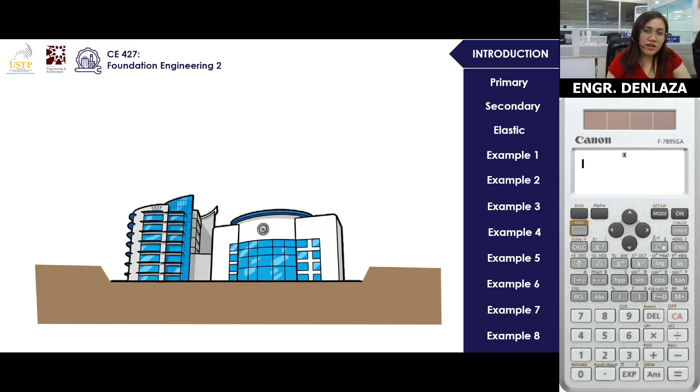So this process, the loading of the building, has exhibited the soil settlement, wherein it is defined as the downward movement of soil due to changes in stresses acting on it. So that's the most simplified definition with regards to soil settlement.

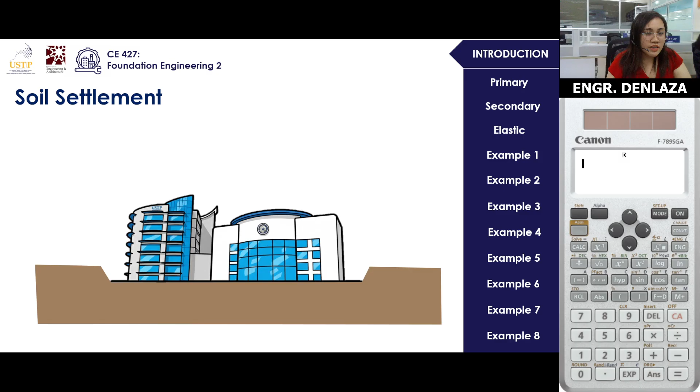To dive in more onto this topic, the mechanism is that when a load is applied to the soil, such as the weight of a building, the soil particles compress and rearrange. This causes a decrease in the volume of void spaces because it becomes more compact, and this compression leads to settlement over time.

There are several possibilities with regards to settlement, such as instant settlement or gradual settlement, depending on the type of soil that a certain structure is located on. So in this discussion, we will be discussing those classifications.

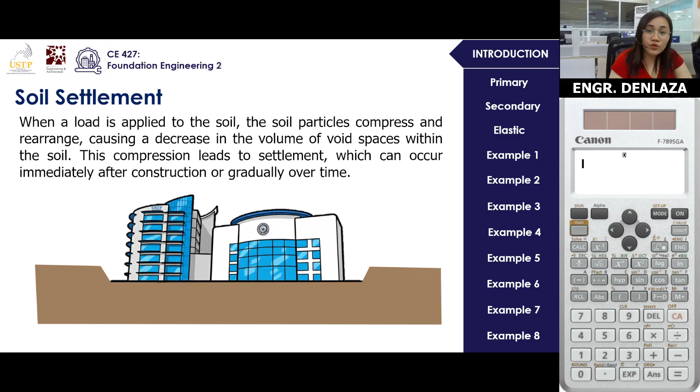To elaborate more on this concept, stress increase in saturated soils causes an immediate increase in pore water pressure. In highly permeable sandy soils, drainage occurs quickly, since we know that sandy soils have larger voids. When that happens, it leads to an immediate settlement.

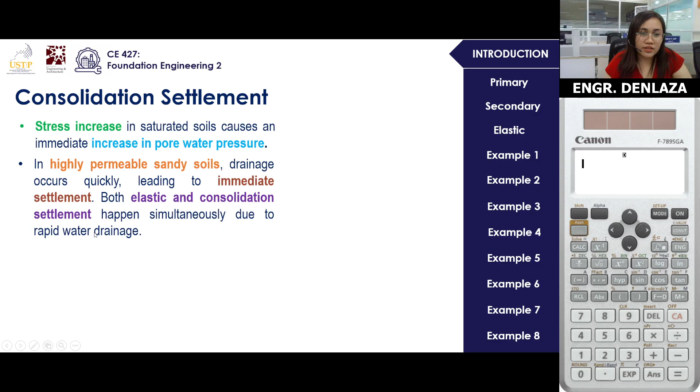Both elastic and consolidation settlement happen simultaneously due to rapid water drainage. Compared to compressible clay, we know that clay has low permeability wherein water drains slowly. As a result, consolidation continues over a long period, and the consolidation settlement can be much larger than the initial elastic settlement.

To elaborate more, whenever there is a stress applied on a specific soil profile—exaggerating it a bit—there will be a downward motion pressing those void spaces, and then there will be expulsion of that water, which leads to settlement.

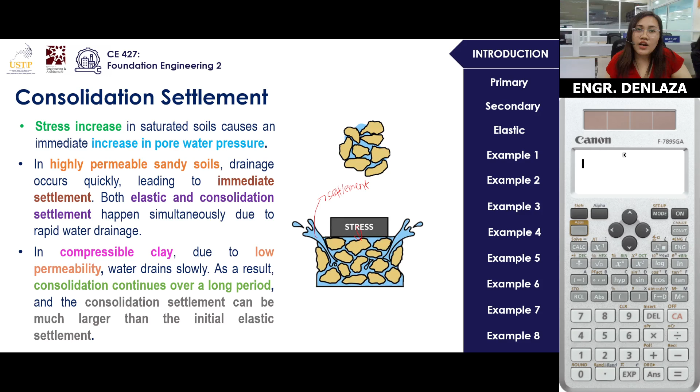So that's an overview with regards to settlement. This discussion will mainly go over three types of settlement, or categories: the primary, secondary, and the elastic or immediate.

Let's define these three before we dive into some examples. Primary consolidation settlement is the result of a volume change in saturated cohesive soils because of the expulsion of water that occupies the void spaces. That's the base model, the typical scenario that happens when settlement occurs.

Compared to secondary consolidation settlement, it is observed in saturated cohesive soils and organic soil, and is the result of plastic adjustment of soil fabrics. For example, if this is your soil, after plastic deformation it turns into a smaller one. Originally it had a certain size, but due to plastic deformation it keeps getting smaller. It is an additional form of compression that occurs at constant effective stress.

Lastly, for the immediate or elastic settlement, it is caused by elastic deformation of dry soil, and of moist and saturated soils without any change in moisture content. It's the most instant response of the soil to the new stress conditions.

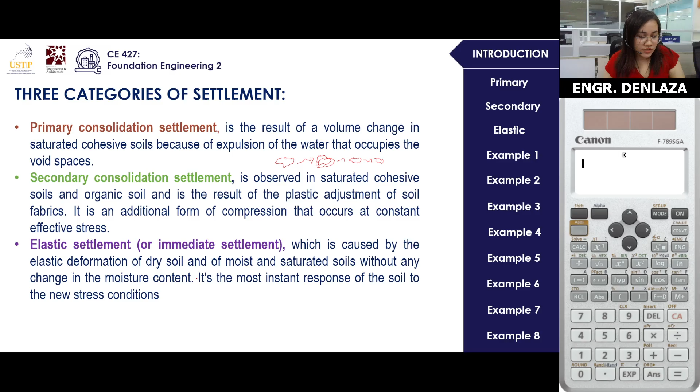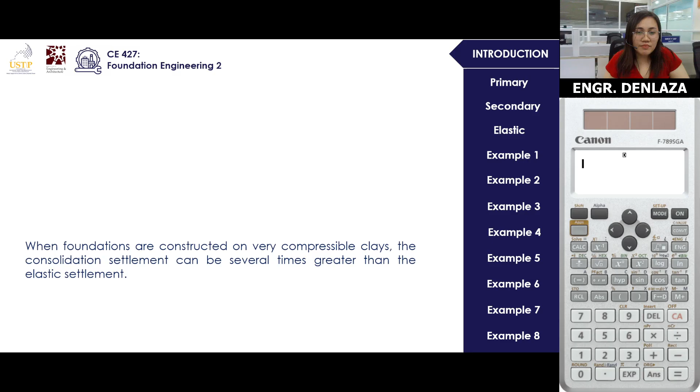Now let's go over the total settlement. What is this total settlement? Total settlement happens when foundations are constructed on clays—we know that clays are highly compressible, and consolidation settlement can be several times greater than the elastic settlement.

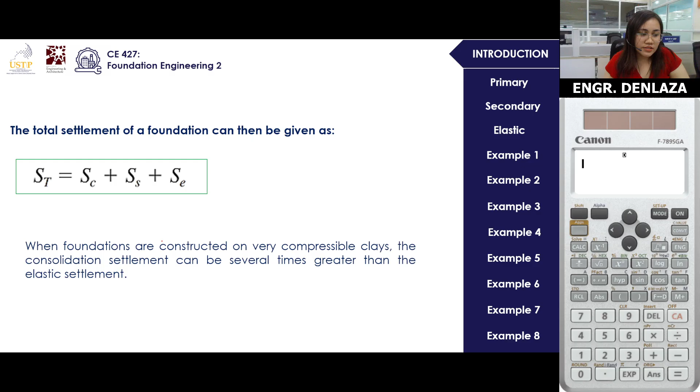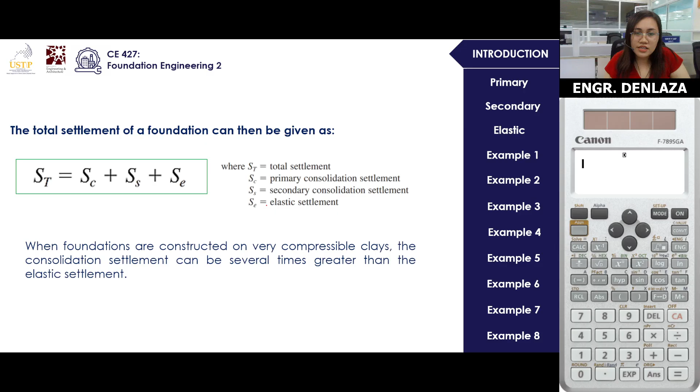The total settlement of foundation, or the total compressibility of soil, is exhibited through this equation: ST equals SC plus SS plus SE. ST is the total settlement, SC is the primary consolidation, SS is the secondary consolidation, and SE is the elastic settlement.

Let's start with the primary settlement. There are actually two scenarios of primary settlement. The first one is normally consolidated clay, whose present effective overburden pressure is the maximum pressure that the soil was subjected to in the past.

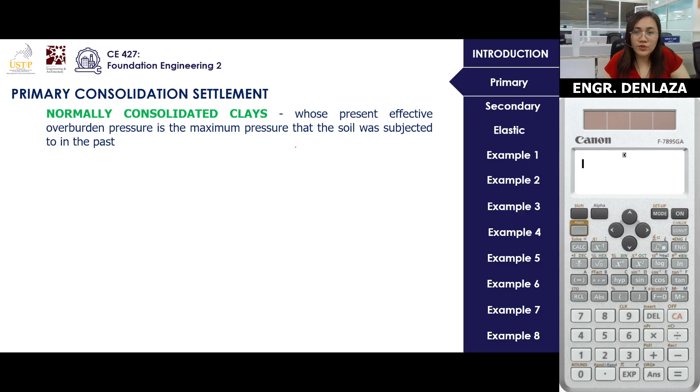Compare that with overconsolidated clays, which happens when the soil's present effective overburden pressure is less than what it experienced in the past. So technically, that's the difference between the two. The maximum effective past pressure is called the pre-consolidation pressure, typically labeled as P sub C.

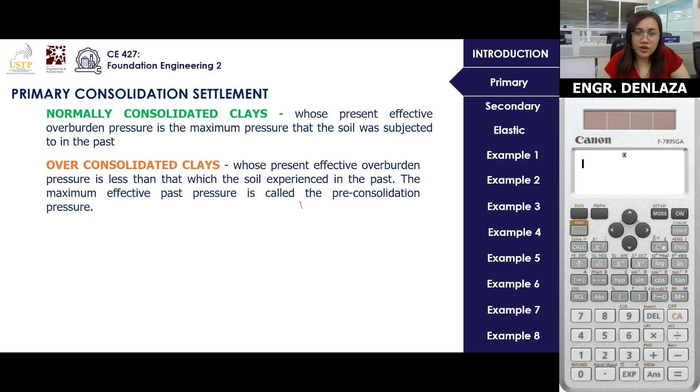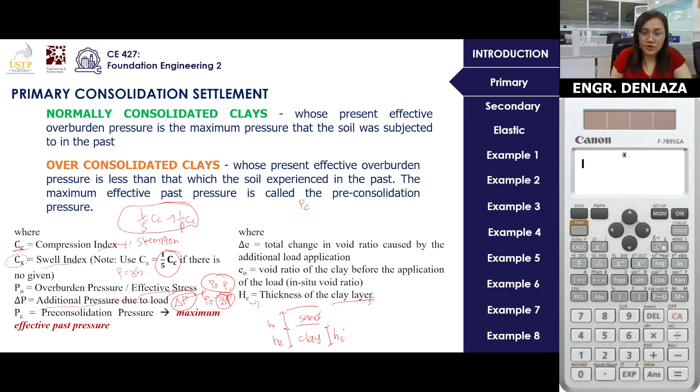Anyway, this is the equation I showed you before: total settlement equals the primary consolidation settlement, secondary, and elastic settlement. But now, since we're talking about primary consolidation here, let's focus more on the SC, highlighted in yellow, which should be visible on your screen.

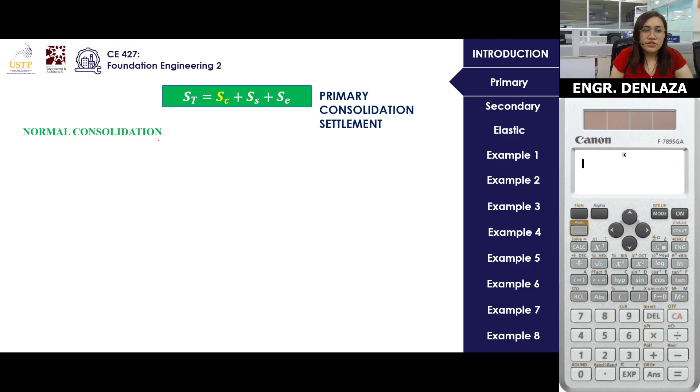So there are two cases: normal consolidation and over-consolidation. Given that, I created a flow chart or flow process on how to solve this. This is the general equation pertaining to settlement in terms of primary consolidation under normal consolidation.

LL is the liquid limit. There are other formulas for compression index, but Skempton's equation is the one we typically use. So focus more on memorizing this.

That's for the flow process in getting the normal consolidation, the primary consolidation. What about if the case tells us it's an over-consolidated soil, or the analysis requires us to account for the overburden pressure? So what's now the difference with the equation? The equation we typically assess ranges between two conditions.

In the first condition, the sum of your initial pressure P sub 0 and your change in P should be lesser than your pre-consolidated pressure, P sub C. If that happens, the equation you will be utilizing should be this one.

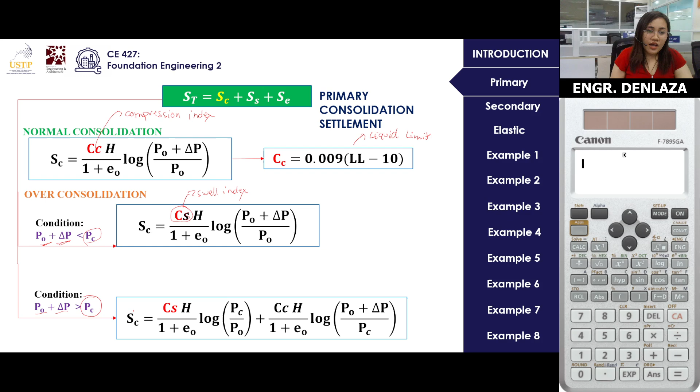SC equals CSH over 1 plus E sub 0, log of the quantity P sub C, which is your pre-consolidated pressure, over your initial or effective stress, plus another term: CC, or your compression index, over 1 plus E sub 0, log of P sub 0 plus change in P, all over your pre-consolidated pressure.

If you notice the differences between those two equations, for me it's not too much of a discrepancy, just specific portions that change. When you start with normal consolidation, the difference is just the CC and the CS. Comparing the overconsolidation first case to the second case, now there are two terms to be taken into consideration.

So there's a ratio between the pre-consolidated pressure and your initial pressure.

If you notice, this is CC, or your compression index. This is not CS. This is just CC, the compression index. And then that's log.

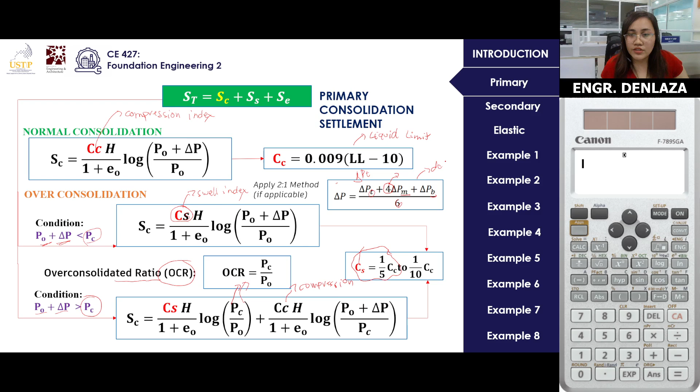Change in P is equal to the change in pressure at the top, middle, and bottom. So if you notice, there's a 4 added here, that means it becomes the multiplier. This is actually a derived equation, but to elaborate more, P sub T is the pressure, change in pressure at the top, at the middle, and at the bottom, all over 6. That's the default formula.

Okay, secondary settlement. We have here the SS. So that is SC which is the primary, then SS is the secondary. If you would elaborate more, this is the equation for now: C alpha multiplied by height, 1, all over 1 plus E sub P, log of T sub 2 all over T sub 1. If we expand E sub P, how do we obtain that?

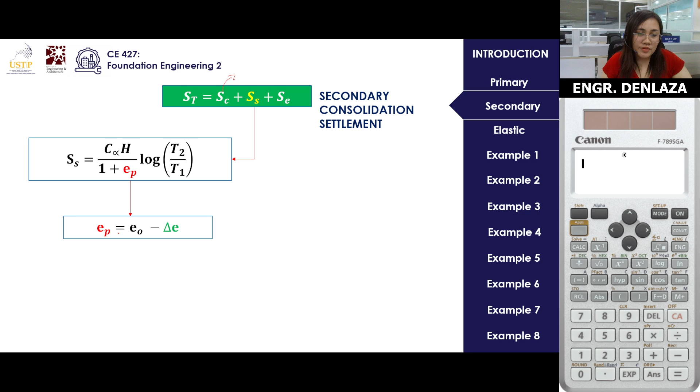That is obtained by this equation: E sub P is equal to E sub 0 minus change in E. And lastly, how do we obtain the change in E? Change in E has this equation: CC log of PO plus change in P all over PO.

I know the variables aren't familiar yet. So again, C alpha is the secondary compression index. Then E sub P is the void ratio, the difference between those. And what I want to highlight to you guys is the difference between T sub 2 and T sub 1. T sub 2 is after the primary settlement, time after completion, so that's typically longer, meaning a bigger value.

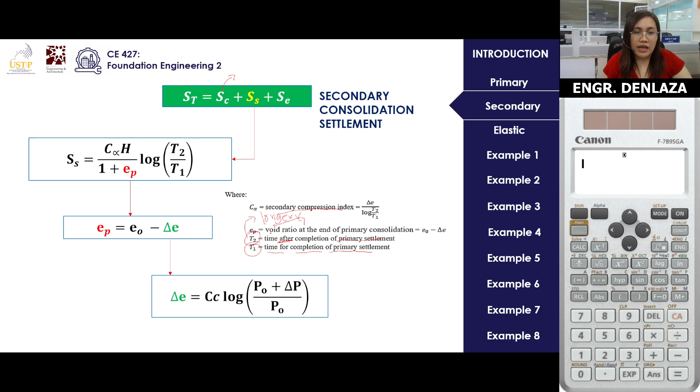And T sub 1 is the time for completion of the primary settlement, so it becomes one. I'll give you an example of this to further clarify the discussion.

Okay, next discussion is the elastic settlement. So elastic settlement is this equation: S sub E. And S sub E has two cases actually: this S sub E is CS times QB multiplied by 1 minus your Poisson's ratio mu squared, quantity all over E sub S.

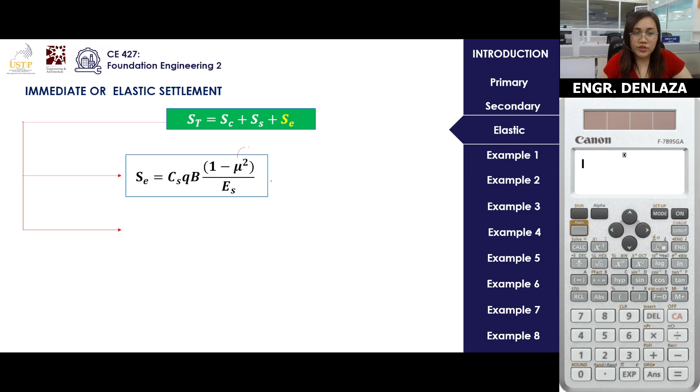And another equation is this one: there's no C sub S, but you have QB, similar but with an influence factor instead. So how do we obtain Q? Q is obtained by force over area, or it could be force. Stress, sorry, this is the force. This is stress, this is the force for the pressure, then this is the area.

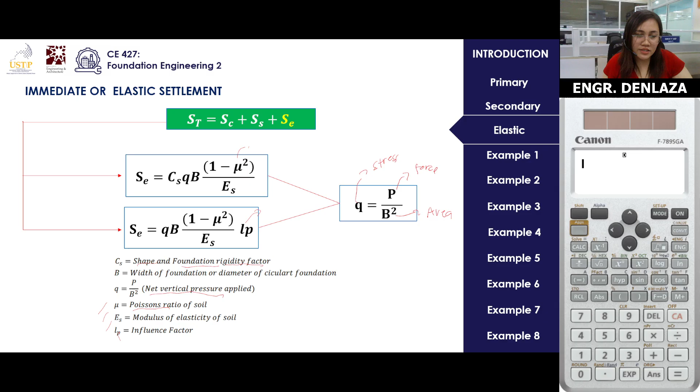Then again, CS is the shape and foundation rigidity factor. B is the width, net vertical pressure, then Poisson's ratio. And E sub S is the modulus of elasticity of the soil, given in the problem, along with the influence factor, IP. In some instances it's called IF, but in my case it's IP.

Okay, let's try to solve example number 1. The soil profile shown in the figure consists of a 9M layer of sand underlaid by a 6 meter layer of clay.

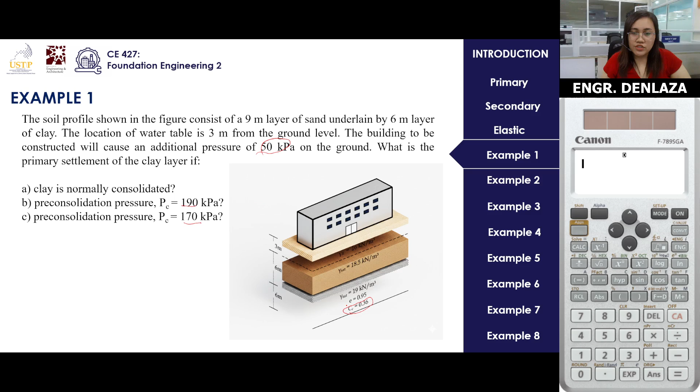The location of the water table is 3M from the ground level, and the building to be constructed will cause an additional pressure of 50 kPa on the ground. So what is the primary settlement of the clay layer if it is normally consolidated, if it has a pre-consolidated pressure of 190, and for part C it's 170. So if you notice in our isometric view, the building sits on a sand layer 9M thick, and you have here the unit weights and other properties, including the compression index and the void ratio. Let's try to solve this problem.

What you should take into consideration is that when you analyze settlement, it's always at the mid-height of the clay. Why is it always mid-height? Typically the explanation is that at the mid-height of clay, of course you won't know exactly if it's uniform, but according to scientists, they account for the average. So to make it safe, the average is taken into consideration. That's why mid-height of clay is what's being analyzed.

So for normally consolidated clay, this is our equation. Do we have the CC? Check. Do we have the H? Naa. E sub 0, do we have it? Yes, check. How about P sub 0? We don't have P sub 0 yet. And do we have the change in P? We do, that's the additional pressure, 50 kPa.

So the first thing to do is solve for P sub 0, and P sub 0 is just the effective stress. So now, how do we obtain the effective stress? If effective stress is solved as what?

So it's gamma H, right? P is the summation, P equals the summation of gamma H. So that's 16 times 3, plus 18.5 times 6, plus 19. If this is 6M, half of that is 3M. So that's 19 times 3, then equals.

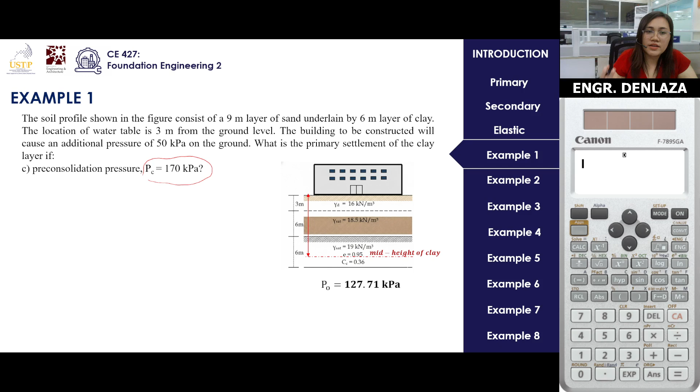And lastly, for the third question in this problem, what if your P sub C is 170? So what now happens? Same process as earlier, but we already calculated that it's 177.71, and that's larger than the pre-consolidated pressure. So since that's larger, we use the other case, which is this equation used earlier. So express that.

That's one-fifth of your CC for the CS, 6,000. 1 plus 0.95, then the 170, which is your PC, all over P sub 0, plus 0.36 - again this is CC, not CS. CC, or the compression index. That's the total height of the clay, HC, expressed in mm. 1 over 1 plus 0.95 logarithmic of 127.71 plus 50, that's P0, and that's the change in P, and this is your PC. Express that in your calculator, we will be obtaining 48.86 mm.

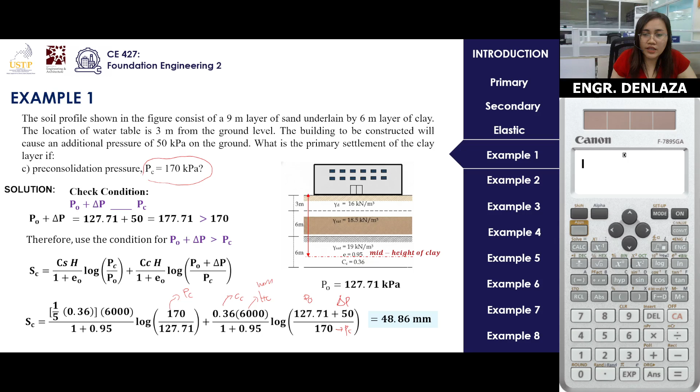And example number 2. A 2-meter clay layer has a void ratio of 0.92, a specific gravity of 2.72, and a liquid limit of 40%. Above the clay is a 3-meter thick sand layer with a void ratio of 0.50 and specific gravity of 2.62.

The water table is located 1.6 m below the ground surface. So if this is your ground surface, the water table is located 1.6 m below the ground.

And a 3 m thick backfill is placed on the ground surface with a unit weight of 17.3. So it's not shown in the illustration, but we have a 3m thick backfill. It's placed on top, not really a mound, but more like a layer, and that's 3m. So it has a unit weight of 17.3.

So this tells us, whatever pressure that you will be getting, that's the change in P. How do we define the change in P? That's the additional pressure. Since it tells us that the backfill is placed on the ground surface, that tells us that whatever we calculate as the pressure here is our change in P. But that's for later. We are to solve for the CC, the effective pressure at the midpoint of the clay, and the primary settlement - that's your SC, assuming normally consolidated.

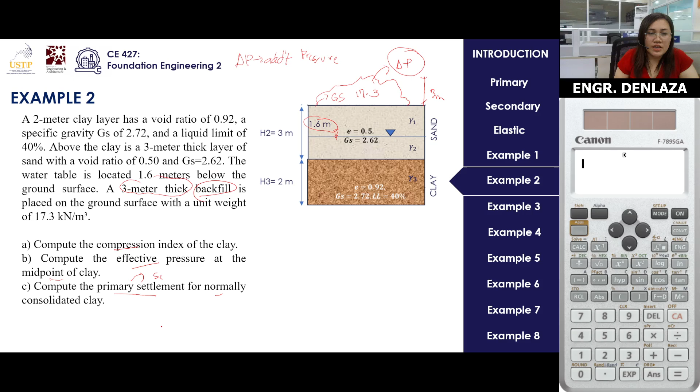So let's solve the first problem: CC. This is the Skempton equation: CC equals 0.009 (LL minus 10), where LL is your liquid limit. Do we have the liquid limit? Yes, it's 40%. So what we're going to do is just plug in 40 here. So CC equals 0.009 times (40 minus 10). Simplifying, we get 0.27 as the final answer.

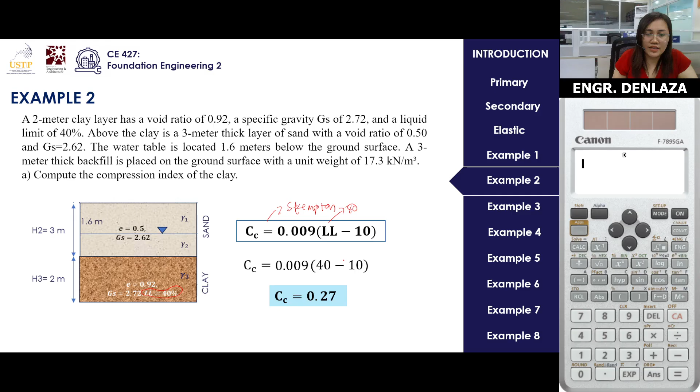Next problem: compute the effective pressure at the midpoint of the clay. So we need the effective pressure at the midpoint of clay and at the sand layer. Let's calculate the sand first. Do we have the unit weight? Of course not, but it's easy to obtain. Since it's dry, we use GS times YW over 1 plus E. Simplifying, we get a unit weight of 17.13 kilonewton per cubic meter.

What about the saturated portion? That's Y sat equals (GS plus E) times YW over 1 plus E. Expressing that, we get 20.40. So actually guys, we can derive this equation as a tool. From this value, we can obtain it. Same thing can be done for Y sat - check it yourselves.

Anyway, let's analyze the unit weight of the clay. The clay layer is saturated. So we use the same equation - those are all values given. Simplifying, we get 18.6 kilonewton per cubic meter.

So how do we calculate the effective stress at the midpoint of the clay? That's P sub 0 equals 17.13 times 1.6 - that's gamma H - plus 20.40 times 1.4, which is this side, plus the mid height of clay, plus 18.6 times 1, because the mid height of the 2m clay layer is 1m from this point. Now this is not yet the final answer, because this portion is just the total stress. We have to subtract the water pressure, because this portion is submerged in water. So that's 1.4 plus 1, which is 2.4, times 9.81. Simplifying, we get the effective stress or pressure to be 51.02 kPa.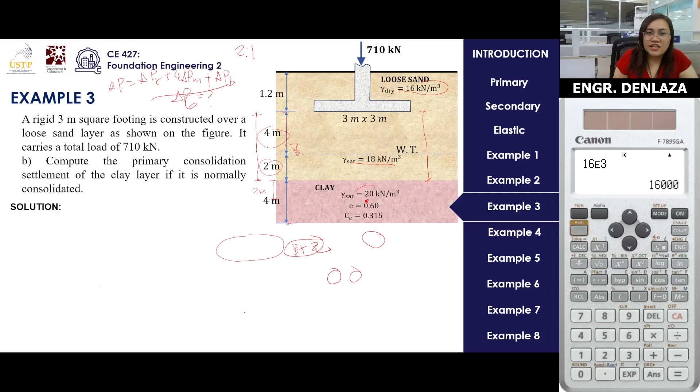Anyway, since we already got the values for SC and SE, recall the generic equation for total settlement is SC plus SS plus SE. Since we already have SC and SE, all that's left is SS, which is the secondary settlement. The secondary settlement equation requires certain values. Do we have the C alpha? Check. Height of clay? Check.

What about E sub P? Is it given? Maybe. Then T sub 2 and T sub 1 are also given, which are the 5 and 2 years respectively. So E sub P is the difference between your initial void ratio and the change in E. But again, your change in E has this equation: CC log of quantity P0 plus change in P over P0.

So simplify that equation: 0.315, logarithmic of 119.96 plus 6.08, all over 119.96. Simplify, and you get this change in E, which is very small. So plug that into this equation, giving 0.60. How do we get 0.60? Using this equation, 0.60 minus 6.764 times 10 raised to negative 3. Simplify and see what you get.

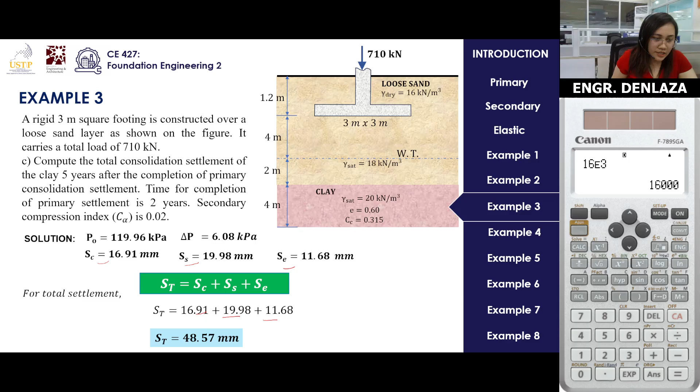That's it for example number 3. Let's go to example number 4.

Example number 4. A soil profile is underlain by 2.4 m thick soft clay layer that will be subjected to severe settlement when the water table is lowered to improve site drainage. The silty sand has a unit weight of 15.60 kN/m³ above the water table and a saturated unit weight of 16.58 kN/m³ below the water table. The clay is normally consolidated, having a void ratio of 1.2 and a water content of 44%, a liquidity index of 0.8, and a plastic limit of 20. Determine the compression index CC, determine P sub 0, the effective stress increase, and the settlement that would occur in the clay in response to the lowering of the ground water.

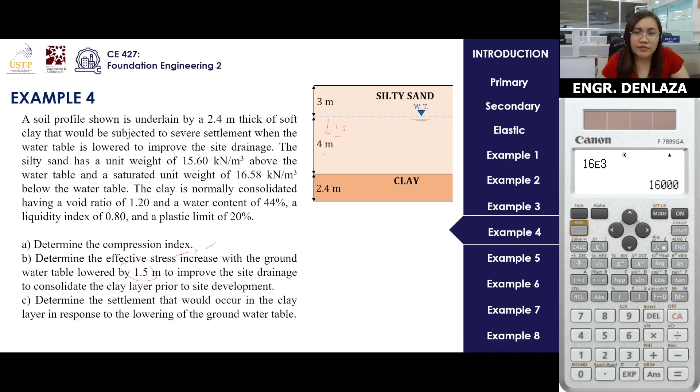Take note that for this condition, the water table was changed — it will be lowered by 1.5 m. So that's our first case, lowering it by 1.5 m. Let's simplify the equation and determine the compression index.

So simplifying, LI which is 0.8, we can get LL from that. W is 44, minus the plastic limit 20, divided by LL minus 20. Simplify to get LL, which is the liquid limit — don't confuse liquidity index with liquid limit, you might get confused. That's 50. Plug that in: 50 minus 10, simplify, and we get a value of 0.36 as our answer.

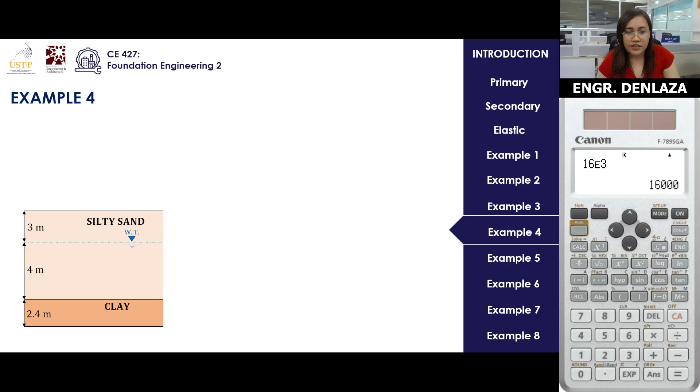For the second problem: determine the effective stress increase with the groundwater table lowered by 1.5 m to improve site drainage and consolidate the clay layer prior to site development.

First, we don't have all the unit weights. How do we get the saturated unit weight? We use the specific gravity of solids, which is 2.73, and plug that in to get the saturated unit weight. We get the saturated unit weight to be 17.52. That's from the weight-volume relationship topic.

Next, using these equations and values for the unit weights, we get the effective stress increase. First condition is the as-is scenario: the current location of the water table is 3 m below the top surface of the silty sand. So gamma H, P sub 01 equals 15.6 times 3, plus 16.58 times 4, plus 17.52 times 2.4 divided by 2, minus — since we want the effective stress — 9.81 times (4 plus 2.4 divided by 2). Simplifying, you get 83.132 kPa.

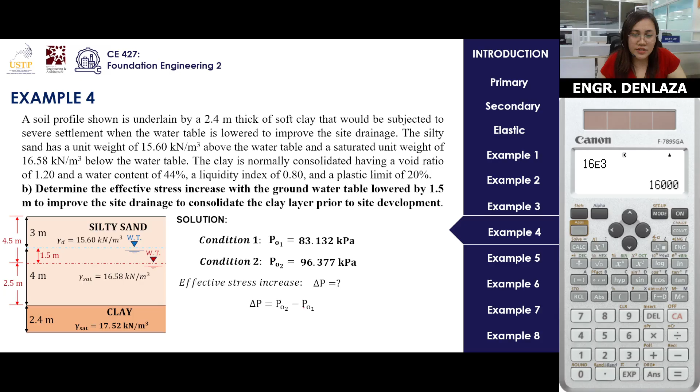So those are the values. Now how do we obtain the effective stress increase? That's the change in P, which is just P sub 02 minus P sub 01. That's 96.377 minus 83.132, which equals 13.245 kPa. Okay, those are the answers.

Now the last problem: determine the settlement that would occur in the clay in response to the lowering of the groundwater table. For normally consolidated clay, there are many possible scenarios, but by default we assume it's normally consolidated clay.

So we use this equation automatically: we have CC equal to 0.36 that was solved earlier, 2400 which is the entire height of the clay expressed in mm, and 1 plus 1.2 which is the void ratio given, times the logarithmic term. If you notice, the P sub 0 initial pressure is the one we used, and the change in P is 13.245. Simplifying, we get 25.22 mm as our final answer.

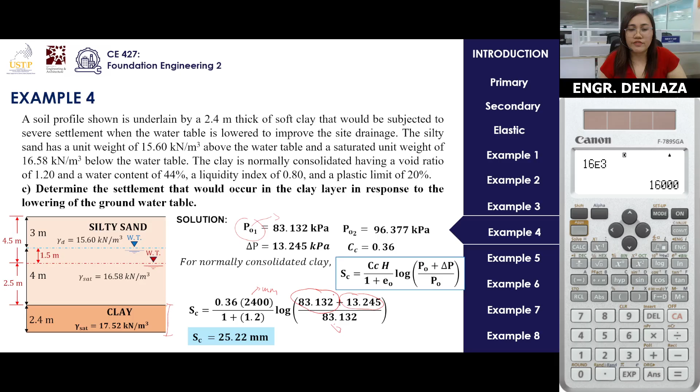Next time, example number 5.

A tank 12 m high, filled with oil having a unit weight of 9.4 kN/m³, is to be built on a site. The existing soil profile consists of 3 m of sand underlain by 14 m of...

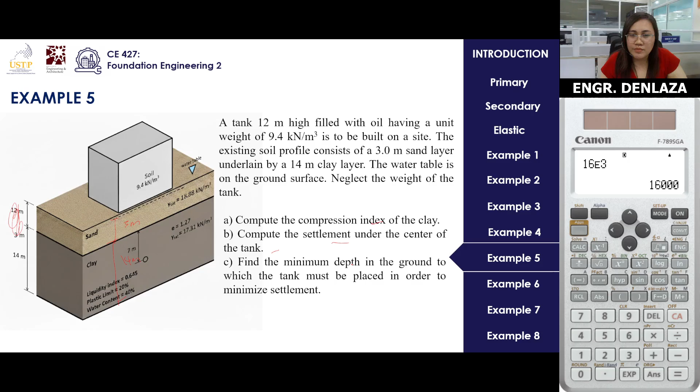So compute the compression index, the settlement under the center of the tank, and the minimum depth in the ground to which the tank must be placed in order to minimize settlement.

Okay, compute the compression index, CC. We don't have the liquid limit, but we have the liquidity index. Solving for LL: LI equals 0.645 equals 40 minus 20 over the unknown, which is the LL. Then minus 20, all over that, simplified, you would be able to get 51.01 for your liquid limit.

So substitute, and the expression gives us 0.369 as the final answer.

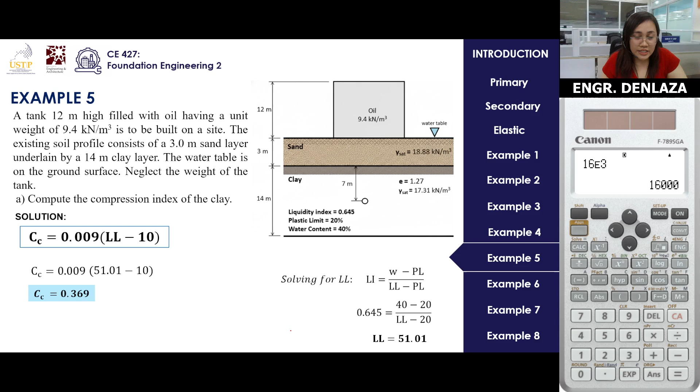By the way guys, regarding the height, I don't recommend the first one — the correct heights are 12 m, 3 m, and 14 m. So 12 m is the height of the tank, 3 m is the sand, and 14 m is the clay.

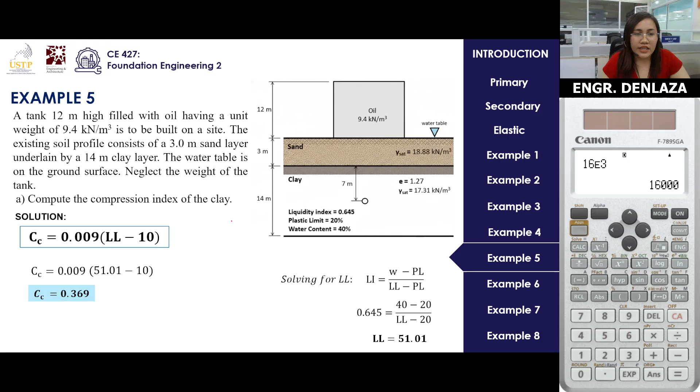Solution: solve for the effective stress at the mid-height of the clay. So P sub 0 equals 18.88 times 3, plus 17.31 times 7, minus 9.81 times 3 plus half of your 14, because the water table is located at the top surface, so everything is submerged for you to get the effective stress.

That's 79.71 kPa. What about the stress increase, the change in P? What happens is that the tank adds an additional load, and that additional load is our change in P.

Since we have a unit weight and we also have the height, pressure is just gamma H. So what we get is 9.4 times 12, giving us a change in P, an additional load of 112.8.

Now for normally consolidated — there's no statement for over-consolidated. It's not clear that it's over-consolidated, which would have a pre-consolidation pressure, or secondary if it's not primary. So just assume it's primary, normally consolidated.

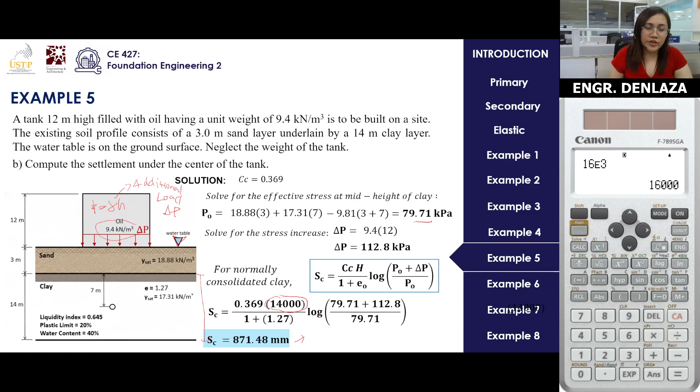Lastly, for this problem: find the minimum depth in the ground to which the tank must be placed in order to minimize settlement. As you can see, what we need to do is equate whatever force pulling it downward, or whatever pressure, to the pressure going upward.

So that's 9.4 times 12, which is the total height of your tank, equals 18.88 times 3, plus 17.31 times h, which is the unknown. Simplify that, and you get 3.24. This is not yet the answer because the total depth in the ground should be D.

D equals 3, the height of the sand layer, plus the minimum settlement needed to attain that depth. So that's 3.24, giving us a substituted 6.24 meters. That's our final answer for this problem.

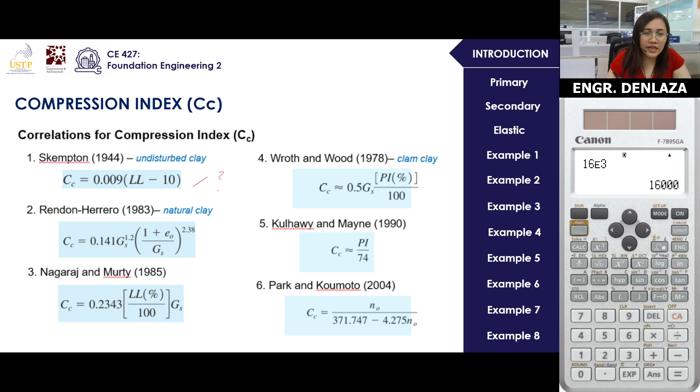Okay, sa palain, time factor kani siya. Importante ni siya ninyo masabtan kay naa'y simple nga equation. That's just T sub V equals to C sub V times T all over HDR squared. Ang T sub V is denoted as your time factor. C sub V is the coefficient of your consolidation. T is the time, typically in years or days.

Now, importante is that you should know whether your HDR or your height of drainage should be half or should be whole. Sige, naa'y two considerations diha sa HDR. Ang HDR nimo is half sa thickness sa imong sample if madrain siya on both sides, and one as a whole lang siya of the sample if drain only one side. So ma'am, how do we interpret that?

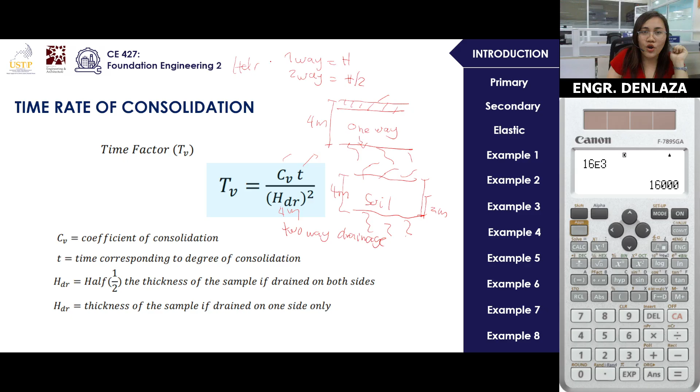Now, what if isa ka portion nimo is dili maka-drain? So isa ka portion, butang nato confined aquifer, tapos dili siya maka-drain. So this is just a one-way drainage. It only drains downwards. So if that's the case, if this is your height of 4M, so your HDR here should still be 4M. Ana na siya pagsabot, ha. So again, to differentiate: pag one way, entire height; pag two way drainage, H over 2. Mura na siya, that's HDR, the height of your drainage. Okay, unta nasabtan, what else?

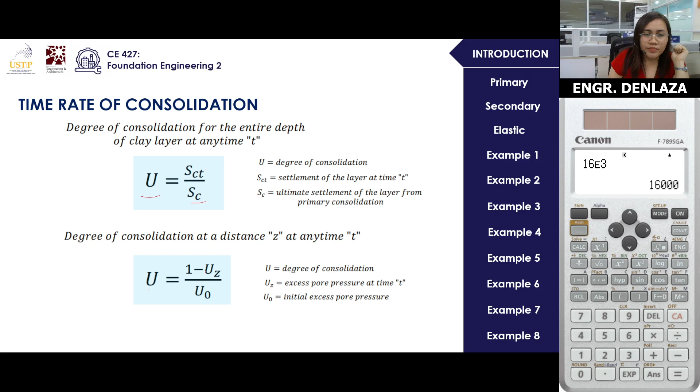Dito sa degree of consolidation, U, ug SCT na siya yung mga given at the time, as well as this degree of consolidation U: 1 minus U sub z over U sub 0. Sige lang, U na atay balisan ni. Sa relationship between the time and the degree of consolidation, naa siya ratio, pero I want to focus more on this portion. Ang U or the degree of your consolidation naa siya two criterion. If your U is within 0 to 60, ang imong i-use in getting your TV or your time factor is this equation. If your U or degree of consolidation is greater than 60, that's the time you will be using the second equation for your time factor. So duha lang siya ka condition, this first condition and the second condition. So you will be checking your value for U: 0 to 60 kaning equation, and if it's the other way around, U is greater than 60, so kaning equation ang use.

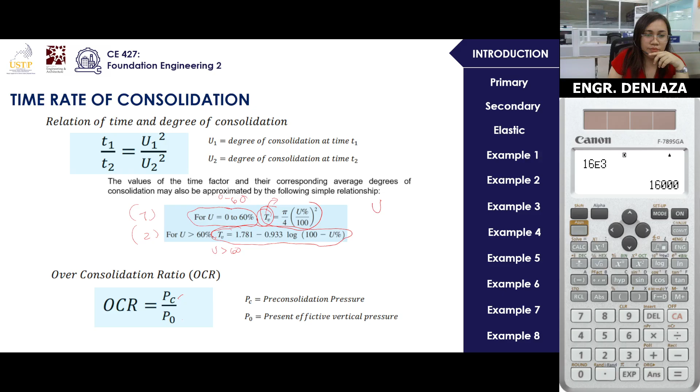Then lastly is the over-consolidation ratio, or the ratio between PC and I think na-introduce na ako ani kagani. So I think let's go to example number 6 na. Okay, para mahuman na ta.

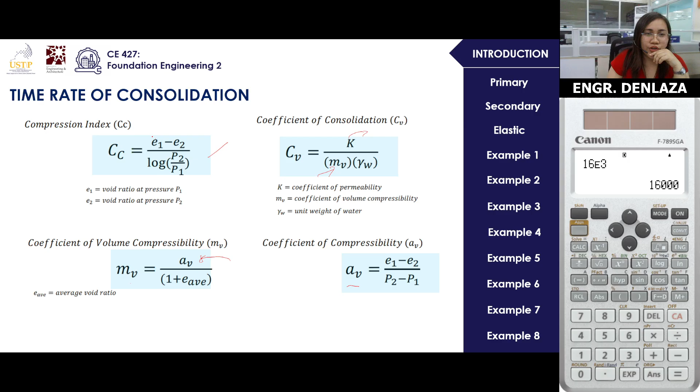Ma'am, question lang, kung pwede ba dimelahan nga maggamit ang Skempton equation or kani, ma'am? So, depende sa given. If naa gani void ratio nga initial o final, and pressure nga initial o final, kanina nga equation ang gamiton. If dili siya ang way, mao na ang time na magamit mo itong Skempton.

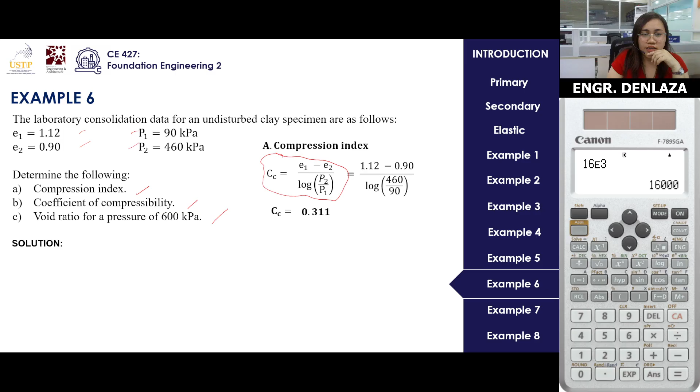So CC is equals to E1 minus E2 all over logarithmic within the ratio between P sub 2 and P sub 1. Simplify, that's 1.12 minus 0.9 all over logarithmic of 460 over 90. So CC equals 0.311 as final answer.

Coefficient of compressibility, A sub V, that's E sub 1 minus E sub 2 all over P sub 2 minus P sub 1. Simplify, that's 1.12 minus 0.9 over 460 minus 90. Simplify, that is our answer for coefficient of compressibility.

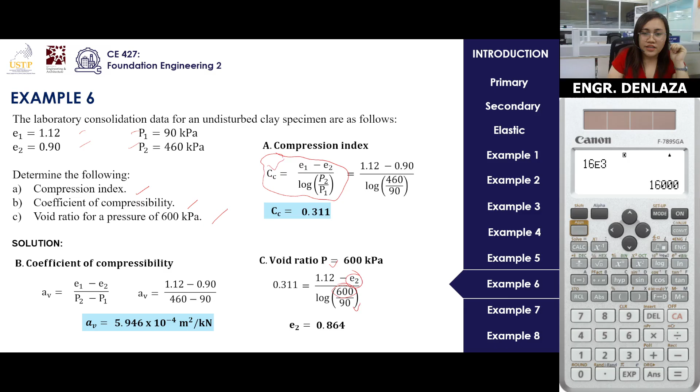What about if the void ratio has a pressure of 600 kPa? We can use CC again. We already know the pressure is 600. I think it's the final void ratio that will change. So what we're looking for is the second void ratio, which is now our unknown. Again, the initial value is retained while the final is changed. Simplify, that's 0.864 as the final answer.

Okay, I believe we're good. Example number 7: In a laboratory consolidation test on a clay sample, given results for e1, e2, and pressures, the thickness of the sample, time of consolidation, 50% of consolidation, and the T sub V time factor. We are to determine the coefficient of volume compressibility, coefficient of consolidation, and the hydraulic conductivity. Let's solve this problem.

What is this equation? Given in the previous slide, that's A sub V all over 1 plus the average void ratio. Again, how do we obtain A sub V? A sub V is obtained by the differences between these two, that's e1 minus e2 over P sub 2 minus P sub 1. So that's the value we can get.

Then you plug that in, whatever you got, because that's the numerator. Then 1 plus the average of these two, 0.92 and 0.78. Simplify, we get an answer of 1.081 times 10 to the power of negative 3 meters squared over kN.

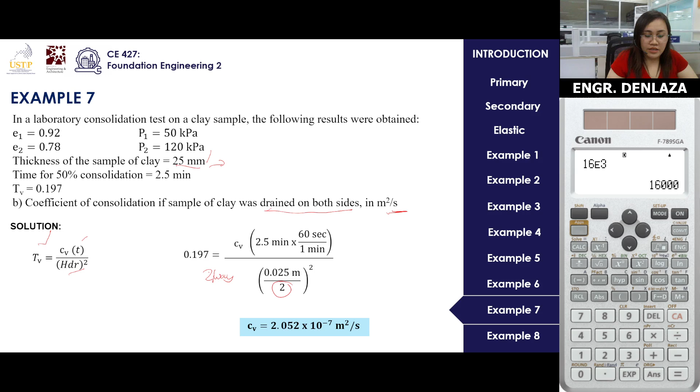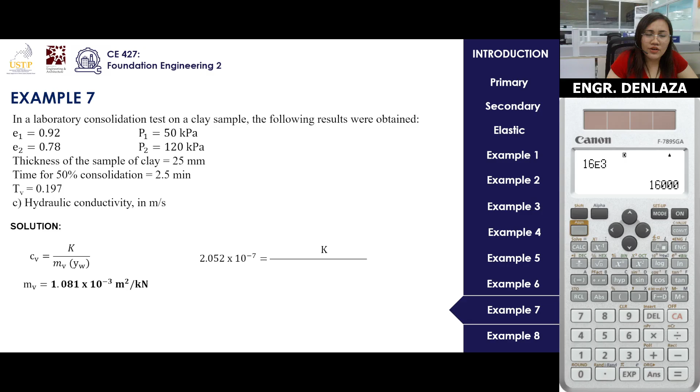Next problem, hydraulic conductivity. This is the equation. Since we have Mv of 1.081 times 10 to the negative 3, and we have Cv already solved, so K equals all over Mv times gamma w. This, by the way, is hydraulic conductivity, and it's now 2.176 times 10 to the negative 9 meters per second.

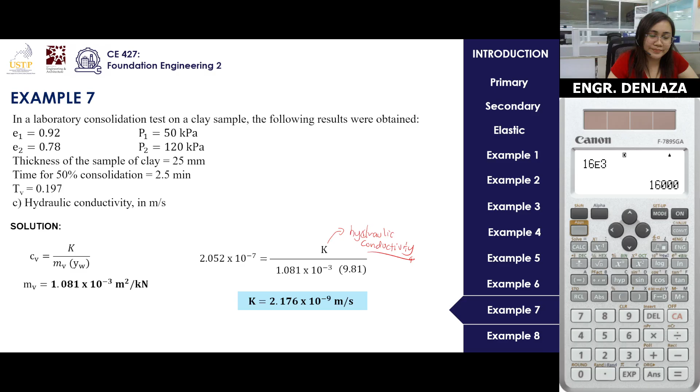And lastly, example number 8. Consider the soil profile shown. We have a uniformly distributed load, change in P, of 31.1 kPa on the ground surface. We have the dry unit weight of sand, the saturated unit weight of sand, the liquid limit, initial void ratio, and the compression index as well.

We don't have any value for our compression index. We have depths 1, 2, and 3 as shown, and we are to determine the primary consolidation displacement Sc, and the primary consolidation pressure Pc. So we still need Sc but now it's over-consolidated. Lastly is how long will it take, which is the time, given a coefficient of consolidation of 0.24.

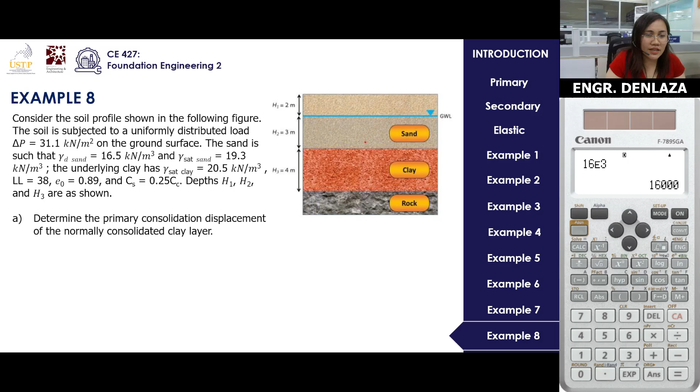Let's take it one at a time. First let's solve the problem. Let's get CC, the compression index, using Skempton's method. That's 0.009 times 38 minus 10, so that's 0.252.

Solving for our effective stress: 16.5 — let me write this down so it's clear. For 16.5, why is that? That's 19.3, what else, why is that? It's clear, let's go, 20.5. So that's 16.5 times 2, plus 19.3 times 3, plus 20.5 times 2, minus 9.81 times 5.

Okay, so I think let's catch up. So, this is now our pressure.

Simplifying this equation, we plug in 0.252, 4,000 indicating the height of your clay layer in terms of millimeters, 1 plus 0.89 which is the initial void ratio, logarithmic of your initial pressure plus the change in pressure, which is 31.1 kPa, all over the initial pressure. So automatically you get 73.82 millimeters as your primary consolidation, given that it is a normally consolidated clay layer.

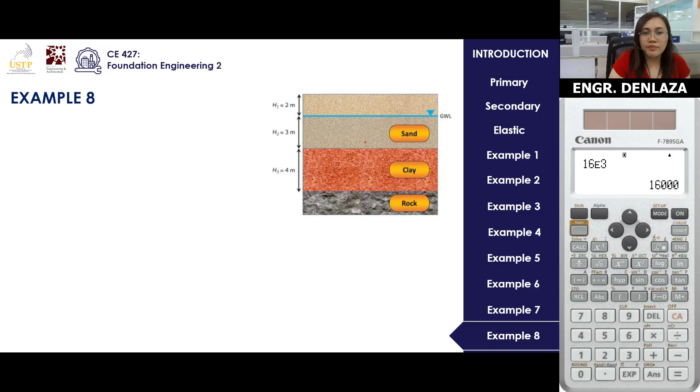What about if the case says the preconsolidation pressure is given? So for this, check if the sum of P0 plus change in P is lesser or greater than the pre-consolidated pressure. So check the condition: P0 plus change in P, that's 82.85 plus 31.1 equals 113.95. Obviously it's larger than the pre-consolidated pressure of 95. So we use the second case.

So this is the equation we will be using. Do we have the CS? I think we can obtain the CS because we have just calculated our compression index. What else do we have? I think we have everything. So that's 0.25 of CC, that's the swell index.

Then 4,000 as the height, and 1 plus 0.89 as the e0. Then the logarithmic of your pre-consolidated pressure, which is 95 as given, all over your P sub 0 which you calculated earlier, plus 0.252 — again this is CC, not CS — and this other one is CS. Take note of the difference between those two. Then 1 plus 0.89, logarithmic of 82.85 plus 31.1 all over 82.85, and simplifying, we get 50.05 millimeters as your final answer for this problem.

Lastly, since we are to find the time, remember that TV equals CV times time over that equation.

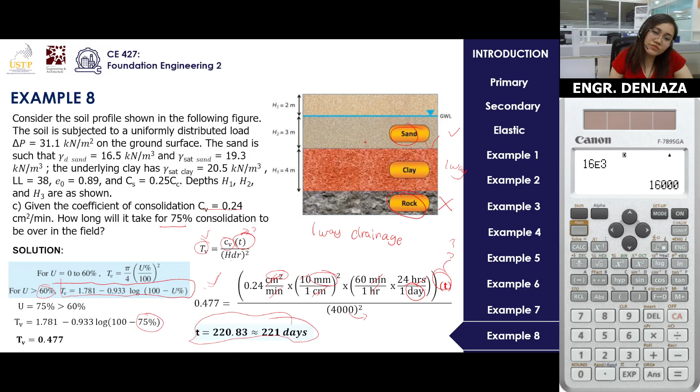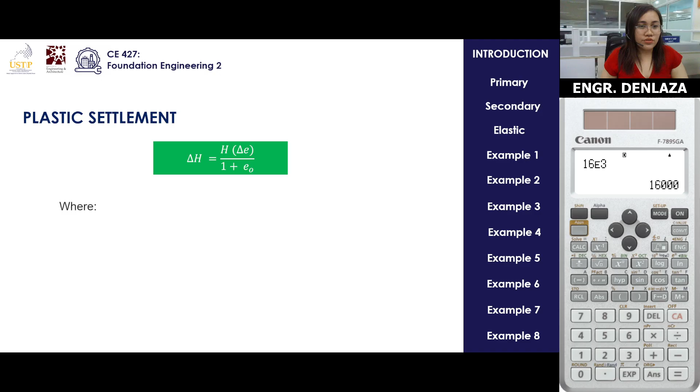So now, let's talk about the formulas that you should be familiar with for plastic settlement. Plastic settlement has this simple equation: change in H equals H times change in e, all over 1 plus e sub 0. Where change in H is the change in clay height, and H is the height of your clay.

It's supposed to be change in e. It has this change in e, and it pertains to the difference between the final and the initial void ratios. It's as simple as that. So automatically you can calculate what is the thickness reduction, what is the difference in the height, and so on.